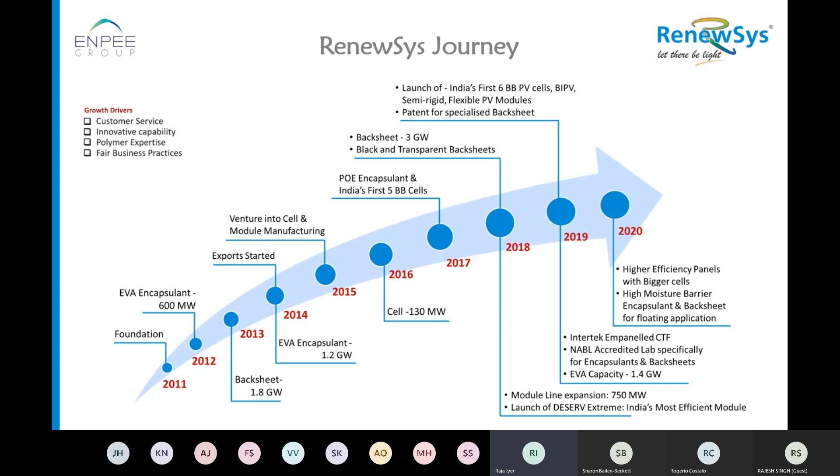The strength of Renewsys is the laboratory and technical expertise. We have got two different R&D centers, one in Bangalore for the components and one in Hyderabad for the modules and cells. And we have a laboratory which has been approved by Intertek, and we have the total facility that testing of modules requires. We can do the IEC test, TUV IEC test, whatever TUV does in the laboratory. Apart from one or two tests, we can do all the other tests in-house.

So many manufacturers in India or globally, whenever they set up a new facility, they come to us. We provide them not only with the components, but we also test their initial modules or samples and give them the results. Though we cannot officially certify it, we can give them a very good report based on which they can go ahead with the certification process.

As I said, we have two different facilities. In the module line, we have got 750 megawatts. Cells, we have 130 megawatt in Hyderabad. And in Bangalore, the encapsulant line is 1.4 gigawatt, where we manufacture not only EVA, but also POE. And the backsheet line is around 3 gigawatts.

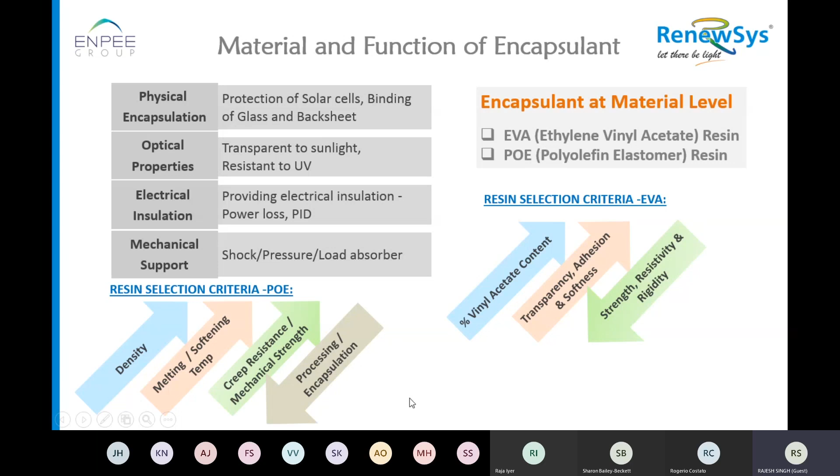Similarly, for POE, the selection criteria is based on the density. I'm just trying to give some more technicality, just to make you understand how selection of polymer happens during manufacturing of these products. So when density increases in POE, its melting point and softening point increase. Creep resistance, mechanical strength, actually they increase, and processing of encapsulant, even at our end where we do manufacturing, and the lamination process, little bit reduces because of its own nature.

Going to encapsulant manufacturing, I have tried to give some basic idea how it is manufactured in the factory. We take resin, which is in pellet form, then mixing of additives is done at the level of manufacturing, where additives could be in liquid form, powder form, or in pellet form. We make this into compound form, and then this compound is fed into an extruder, which is nothing but a heat and process from starting into the extruder.

Then it is cast on a roll, which is a chill roll, and finally it comes on a winder, where a roll form of encapsulant is made, which looks like this. This is just a roll, which could be say 100 meter to 200 meter or 300 meter length, and they look like this in the sheet form. I think you all know, because you must be using these encapsulants in sheet form almost every day.

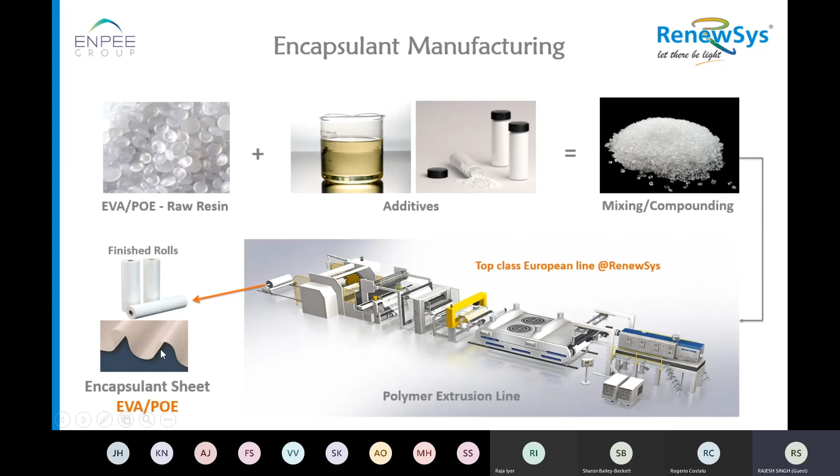Now coming to a little more technicality of encapsulant, how does it function? Encapsulant, whether it is POE based or EVA based, is actually polymer. The polymer is a plastic material which has various types of molecules of different chain length, branching, short branch, long branch, which look like this in the linear form.

So when we do the formulation at our end, where manufacturing happens, we add some cross-linking agent which then reacts in the module under heat and pressure, and they get cross-linked. So one polymer which is in sheet form before lamination converts itself into rubber form, where the resin attains its own property of longevity, which makes the module survive for its lifetime in the field.

A few basic properties of encapsulant which we control are degree of cross-linking, by way of formulation and process, and transparency, again based on the selection of material and process involved in making them in the sheet form. We add some material which makes peel bond, or bonding of these encapsulants with cell, glass or back sheet, because encapsulant is the only material which binds everything together. It also provides volume resistivity, which gives PID resistance to the cell and complete module when it is made. And finally, dielectric strength is the electrical property of the module, which gives safety.

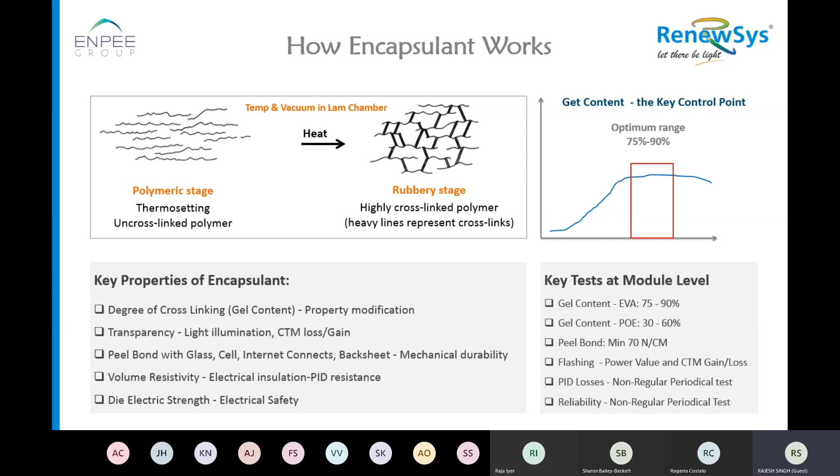For example, gel content, peel bond, flashing of the module based on their flasher, which gives how much wattage has been generated or how much is CTM loss or gain after making the module from cell to the final stage of module. And PID losses also is one property which is to be tested, because this is one which gives power loss when modules are installed in the field in a hot and humid condition. Reliability, of course, is a major factor in a module, because they are supposed to be in the field for 25 years, and largely the quality of components including cell, backsheet and encapsulant determines its longevity in the field.

Moving to the next slide, I have given a brief comparison between EVA and POE encapsulant. So basically EVA was introduced, as I said, around 20-30 years back. It was basically for glass to backsheet structure. Even today, this is the dominating encapsulant in the market, and glass to backsheet is the dominating design of module in the field. So if I do the one-to-one comparison, glass to backsheet is for EVA, whereas TPO or POE can be used for glass to glass. It could be used for crystalline silicon cell, thin film technology module, whether it is for CIGS or it is for cadmium telluride. These are a few technical names. I hope that we all understand, but any more clarification can be given later.

So EVA is cross-linking type. POE could be cross-linking or non-cross-linking type depending on the structure of the POE during the formulation. Mechanical strength of POE is more. POE also has a property which is called creeping if it is not properly cross-linked, because as I said, there are two types of POE available in the market. So non-cross-linkable POE can give creep, especially for glass-to-glass configuration of module. PID is one property which is very good for POE encapsulant because they are naturally electrically insulating in nature, and its volume resistivity is 10 to the power 16, unlike EVA which is 15 or lower. POE is also better in moisture property in terms of moisture barrier and its sensitivity to moisture.

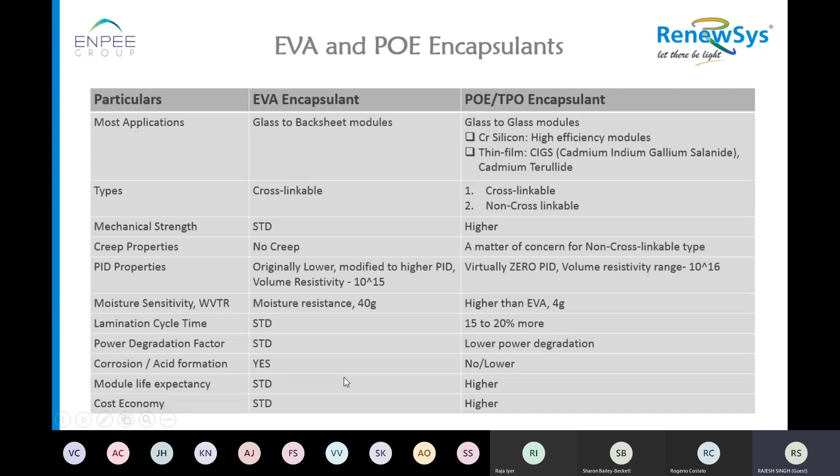The only drawback of POE is that it takes a little more time in lamination. Generally, it is glass to glass which is used for this, and it takes a little bit longer time to penetrate heat through two sides of glasses. And it is less corrosive. It is higher in module life expectancy because it does not create any chemicals, and also it does not create what is called acetic acid, because POE is neutral, or we can say non-polar material, whereas EVA has acetic acid formation because of presence of vinyl acetate, as we discussed before.

Now among various encapsulants, we said EVA and POE are two dominating ones. And within EVA and POE, there are two variants of encapsulant. One is UVT and second is conventional. UVT is nothing but ultraviolet transparent, which is a new entrant into the technology of PV, which came around 3 years back. If I give a very brief comparison, in conventional encapsulant there is some formulation in the recipe which makes light get blocked if it is less than 360 nanometer. The purpose is to block this light, which is UV rays, which were supposed to be harmful for the cell and the backsheet below it earlier.

But now, due to the invention of newer technology and better material in the PV segment, we can now allow this light to pass through the encapsulant, and it can generate more power, because when more light reaches the cell, it can generate more power because more incident light is falling. This happens only when you open the window of encapsulant from 360 nanometer onwards to 220 nanometer now, because that is the main purpose of doing this, making it UV transparent.

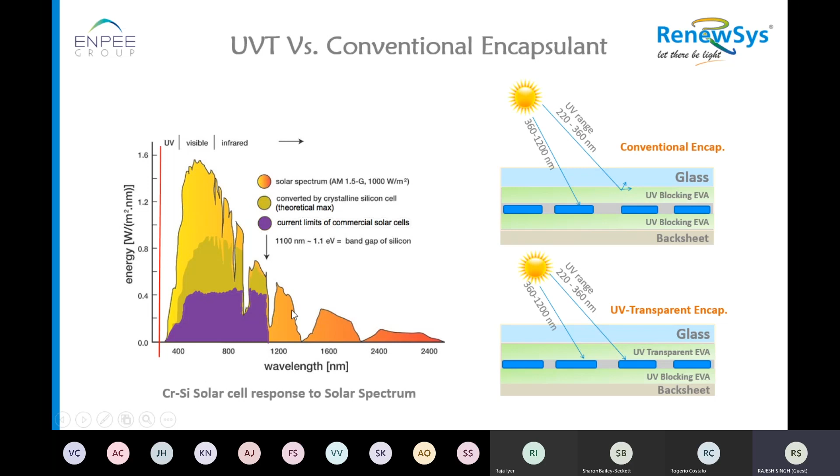If I tell a little bit more on this, the sun contains light all the way from around 200 nanometer to 1200 nanometer. Earlier, people used to block from 200 nanometer to 360 nanometer, and they were allowing only from 360 nanometer onwards. But now, if we allow from 200 nanometer or so, that much more light we get on the cell, and the cell generates more power.

Now, PID is another phenomenon which the industry learned around 5 years back. It is the phenomenon where power loss happens during field generation, especially when negative system voltage is generated in the string where the climatic condition is hot and humid. PID is actually caused by various factors in the PV system, starting from the system level to the module level, to the environmental level, and finally cell level.

This is two types, reversible and non-reversible. Reversible is something which is just polarization during the day, and when you earth the module from negative system voltage it goes away completely. But if the phenomenon continues for a longer time, actually the electrochemical reaction happens, which leads to corrosion of metallic parts, and then it becomes difficult for PID to get reduced.

In that case, if I focus only on the module level PID control, which is actually caused by low volume resistivity of encapsulant or maybe the type of encapsulant. So at module level, it could be controlled by reducing the conductivity or increasing the volume resistivity. These are properties which are inversely proportional. Or we can choose an encapsulant which is non-polar in nature, and that is the POE we discussed, where its volume resistivity is higher naturally.

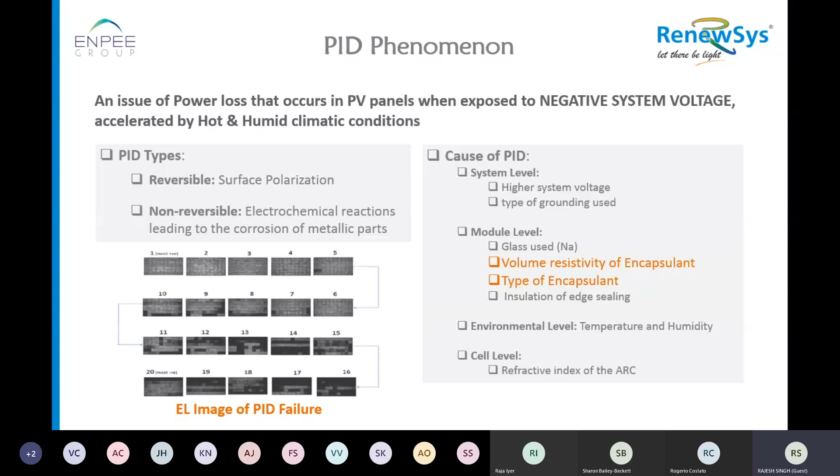At cell level, it is controlled by increasing the ARC, which is called anti-reflective coating, which is done during cell manufacturing. And this is actually nothing but increasing the refractive index of the anti-reflective coating. Because PID is caused by the PV system at different levels, the solutions are also derived at different levels.

So if I talk only on the module level problem, which is caused by low volume resistivity of encapsulant, we could see here that an encapsulant of around 10 to the power 15 ohm centimeter is good enough to control PID caused by encapsulant in the module.

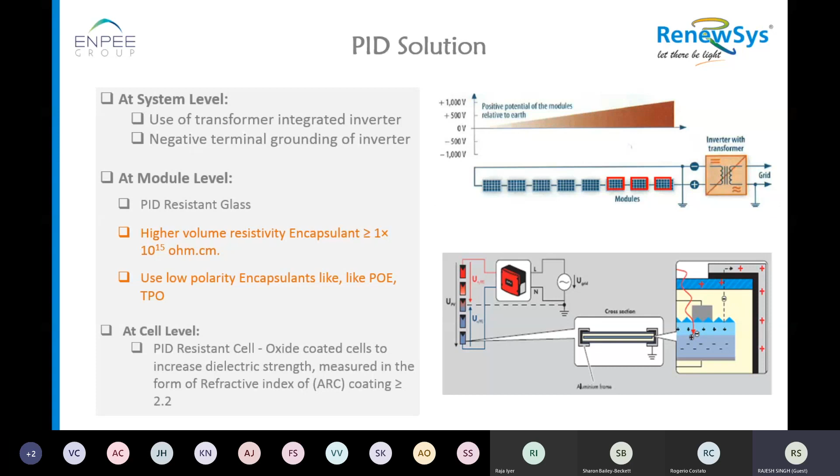Whereas if we use POE and TPO, let me tell you, POE and TPO are the same. They are called interchangeably from country to country, company to company, but generally POE is a little more cross-linkable, TPO is a little less, but in fact they are the same material. So if we use POE or TPO, they are naturally more volume resistant and give more resistivity to the cell, stopping the current leakage.

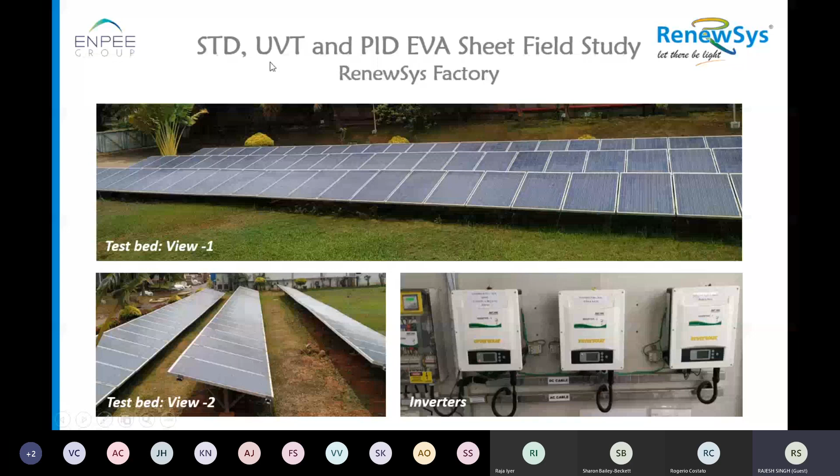We have done one interesting study in our company where we installed module demo plants of 6 kilowatt each using standard EVA, UVT EVA and PID EVA, and we compared the data of the last 3 years, and found that whatever is talked theoretically, practically we are getting the same result. So a few conclusions can be drawn: the PID and UVT combination gives the highest power in all the seasons, followed by PID, and the least power generation happens in standard EVA.

PID is the property which we said will reduce the power loss under hot and humid conditions, and UVT gives more light to the cell, hence generating more power every time. So these two combined give the highest power generation, and all three types are also seasonal. That means when there is more DNI, all three generate more. If it is low, all three generate low.

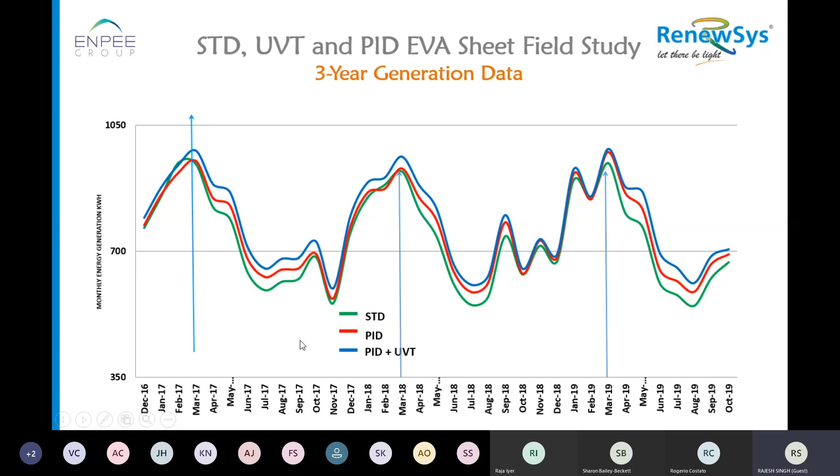So the difference is 6.6% in power generation from standard EVA to PID and UVT type. This is the 3 years cumulative data generation. So in conclusion, we can say that if one uses a PID and UVT combination of EVA at the front and PID plus standard EVA in the back, it will be the best combination to generate the highest power.

And this phenomenon will be noticed at the module level in your factory only if you have a flasher starting from 290 nanometer, because otherwise this will not get detected by your detector in the instrument, and you will not get the value, because the cell will not generate power since it is not getting the light. So the light has to be there, which is 290 to 360 nanometer, in your flasher.

And of course, solar glass is also one contributing factor for PID, which we have not discussed in detail because that was not the subject of the day, but it does contribute. And if we can match the UV cutoff wavelength of the glass with the front side EVA, it gives the best combination.

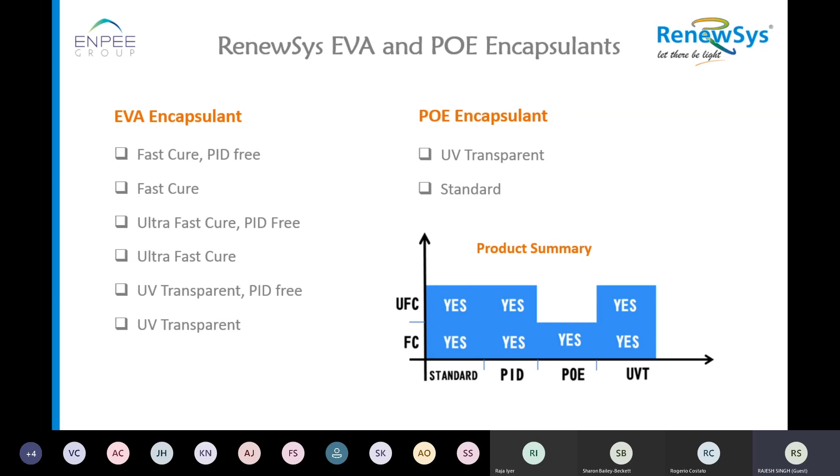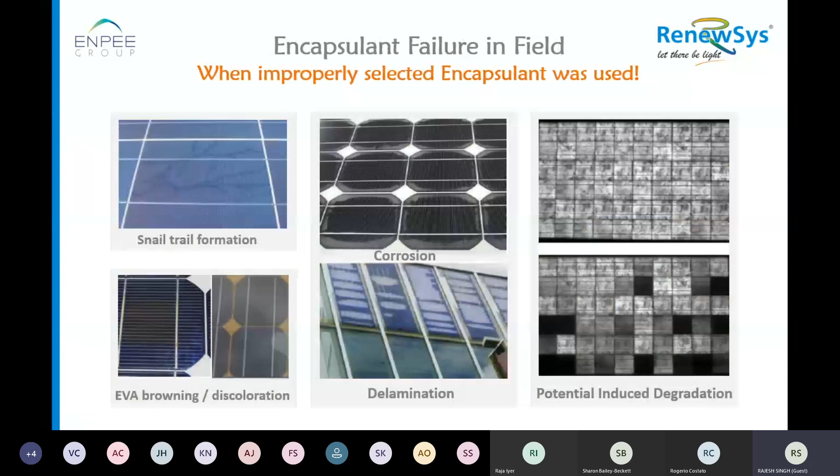Now moving to backsheet. Backsheet is typically 3 to 4 layers. It could be a laminated, coated, or semi-coated, semi-laminated sheet or polymer, of different combinations, which we'll discuss in the next slide. But starting with the function of backsheet, like we discussed for EVA, the function of backsheet is to give the module resistance from weather conditions.

It could be dirt, dust, chemical, hydrolytic attack by moisture which comes from rainwater or moisture from the ground, and it could also be resistance from UV radiation which comes from reflection of light from the earth.

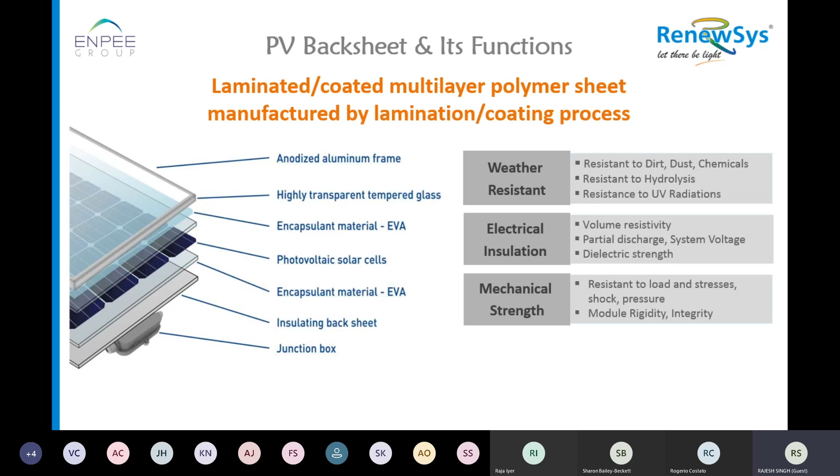It definitely provides electrical insulation because this is the only layer from outside which protects the cell, and this is the major safety aspect of a module, to be highly electrically insulating and resistive, to avoid burning or electric discharge. It also provides mechanical strength to the module because it covers it from the back, and you have to protect the cell through EVA to give the module mechanical rigidity.

There are basically three different types of main back sheets. Overall there are various types, but these are the ones covering the majority of the market. Starting with the laminated one: this back sheet is called laminated because all three layers, or both layers if it is two-layer, are laminated with adhesive, which is glue applied during the lamination process.

To give you a very rough idea, this could be all three layers laminated. Laminated and coated could be one layer laminated and the other layer coated, whereas the middle layer is common. A coated back sheet could have both layers, outside and inside, coated. The outside layer faces the air and the inside layer goes towards the encapsulant. A very brief comparison of properties, if I divide it into only laminated, and laminated plus coated and coated together.

A laminated backsheet should be preferred because of the cushioning effect, which results in less cell cracking. It gives better integrity because it carries more mass, more polymeric material with more toughness, and it is moderately priced.

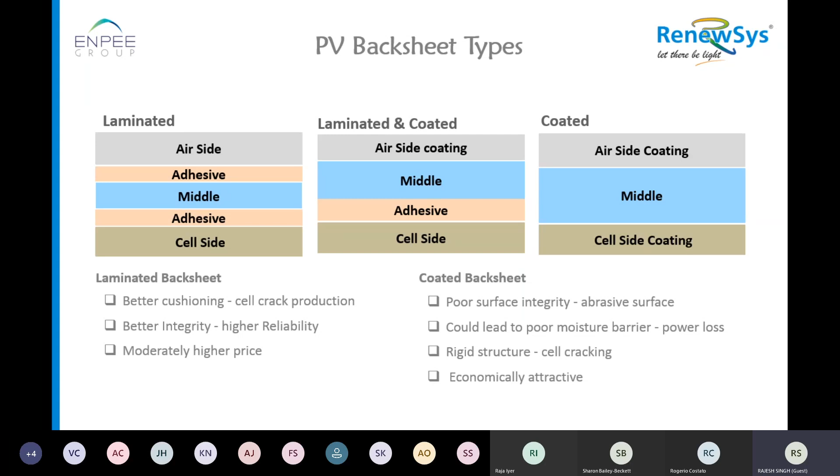Whereas a coated backsheet is poor in surface integrity because the surface of the backsheet is coated. This could lead to a poor moisture barrier because there is one layer, not a laminate of film, and any coating has porosity, so moisture passes through it. Then rigidity of the back sheet is higher because there is no cushioning layer, so it can lead to cell cracks. Of course, it is economically attractive because the cost of manufacturing is less, being two-layer coated or one-layer coated.

This is again a chart for a manufacturer like us, where we select various types of material for each layer: air side layer, middle layer, and cell side layer. These three layers are supposed to impart certain properties. For example, the air side layer has to have UV resistance, hydrolysis resistance, low moisture, because it faces the environment.

The middle layer gives more mechanical property, moisture barrier, and electrical insulation, because it gets protected by two layers, and all these critical properties are preserved within this layer, being sensitive. This could also be a foil-based back sheet, if the application is for a highly sensitive cell like CIGS or thin film, which uses a thin coating of photosensitive layer to be protected from moisture.

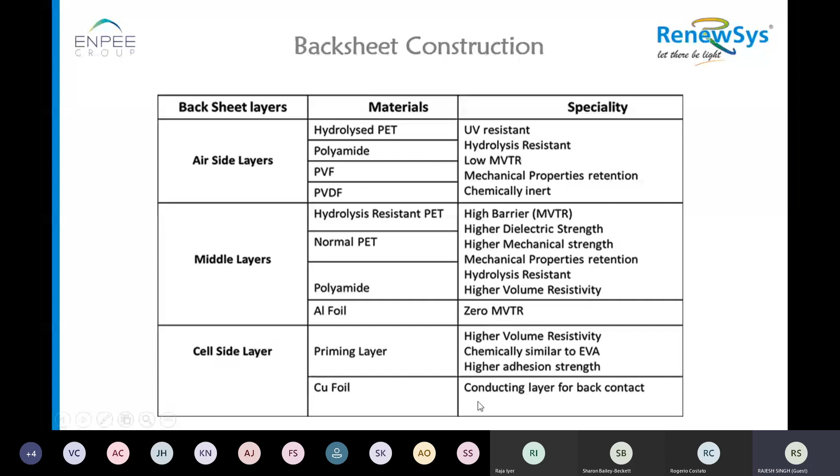Then the cell side layer of the back sheet should have better volume resistivity because it is going to face towards the cell. It should be chemically compatible with EVA because it is going to adhere to the EVA, and it should have better cushioning and pliability to support the cell from cracking.

Within back sheets, we have fluoro-based and non-fluoro-based. Let me tell you briefly, there are three scenarios where fluoro or non-fluoro types can be used. Non-fluoro types are the ones having polyester EVA, as we generally say in the market. These back sheets came into the market in 2008, and they picked up the majority of the market by 2012, because they were economically better but performed the same.

Single fluoro back sheet is actually the second stage after double fluoro. Double fluoro was the first backsheet, introduced maybe 20 years back at the start of module technology, where both sides of the backsheet were fluoro, and frankly it was not needed, because it makes the backsheet structure too expensive. At the same time, it is not too good for bonding with the cell, especially from the fluoro side which is towards the cell.

Single side fluoro is more preferred today. It is called fluoro polyester EVA, and the majority of the market is moving towards it because it gives the benefit of cost, and at the same time the property of fluoro on the top side, because you need fluoro more on the top side, which is the air side, than inside, where it is actually not needed. So industry has learned, and everybody, if fluoro, is now going for the single type. Though some companies are still using double fluoro, it is in fact not needed.

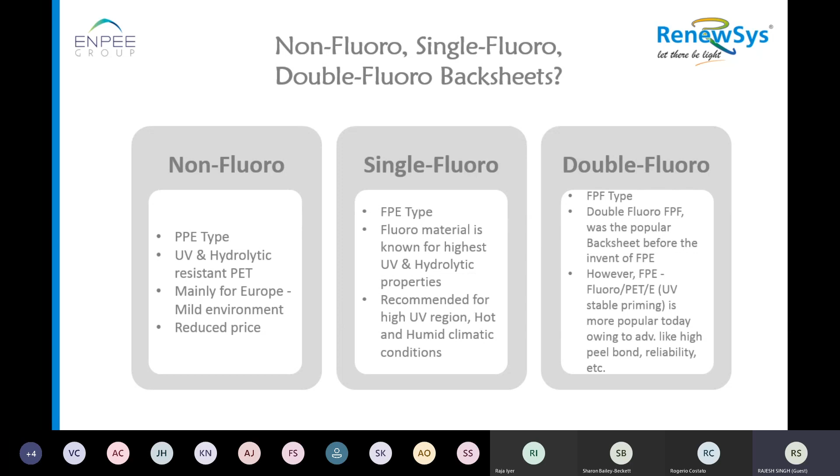Selection criteria for a backsheet start from structure, whether you want coated or laminated. This is based on the economics of the project. Then it comes to single stage or double stage, because the laminator makes a difference in using a particular type of backsheet: low shrink, high shrink. So we know what to do. We actually check with the customer what type of laminator they have, so that we can select the raw material accordingly.

Thickness of backsheet is important in terms of whether one is going to use the module for 1000 VDC or 1500 VDC. It's called voltage DC of system, and we select fluoro and non-fluoro based on whether you are in a more UV radiation zone of the earth or less. For example, in Arizona or Africa, where UV radiation is more in the sun, you actually need fluoro based, whereas non-fluoro based is more suitable for low UV radiation areas, like probably part of Europe or even US,

because those are more forgiving climates. Plastic or metallic based backsheets are used for special applications like metal wrap through or back cell contact. These are newer technologies which were introduced in the market 2-3 years back, but in fact because of cost they could not take off.

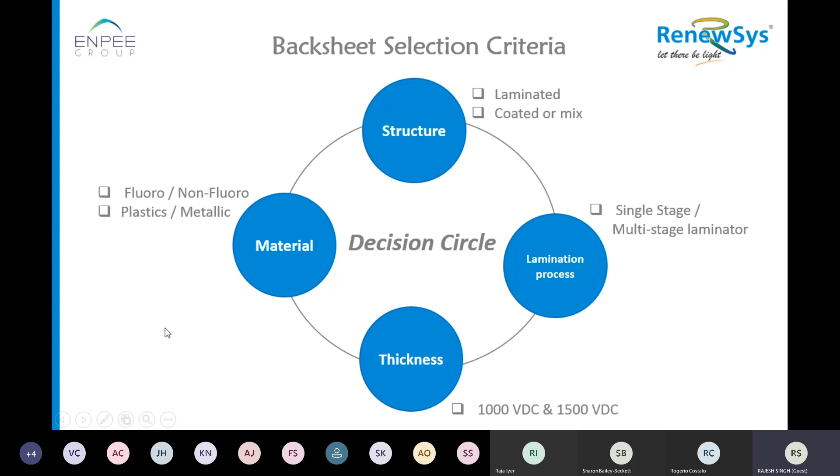So in a nutshell, in backsheet we discussed fluoro, non-fluoro, but all these types of backsheet could be transparent or could be white. So today 95% of the market of backsheet is white, which is normal glass to backsheet structure, whereas a new backsheet is coming into the market which is transparent backsheet, and this is to replace the glass to glass by glass to transparent backsheet. Glass to glass or glass to transparent backsheet modules are used for bifacial cells and building integrated photovoltaic BIPV. These backsheets are made by us, and we also supply them.

This is not a big market today, but the trend is to go for bifacial or BIPV. Time is moving towards this, and probably there will be good volume of transparent backsheet usage in future, maybe 2-3 years from now.

So glass to backsheet and glass to glass, if I give a brief comparison, it starts from lighter weight. Glass to glass is heavy weight. In fact, we'll share these PPTs, so I cannot go in each detail, but generally glass to backsheet is a preferred candidate today over glass to glass, basically because of fragility. It is more fragile and it is costlier, it is heavier.

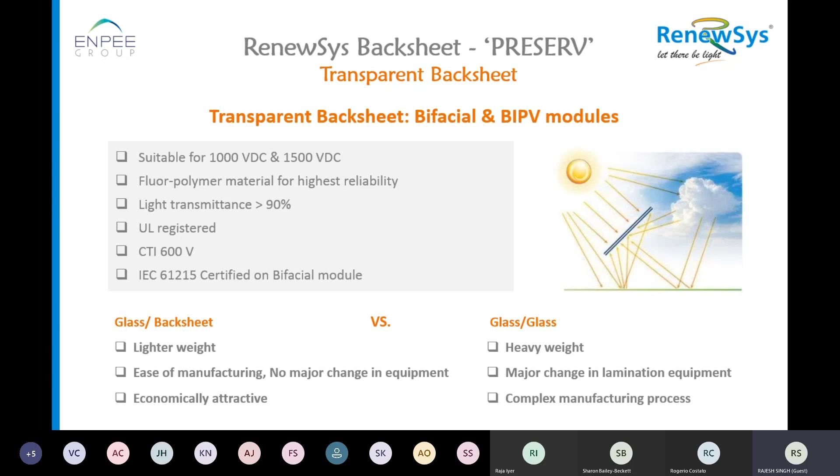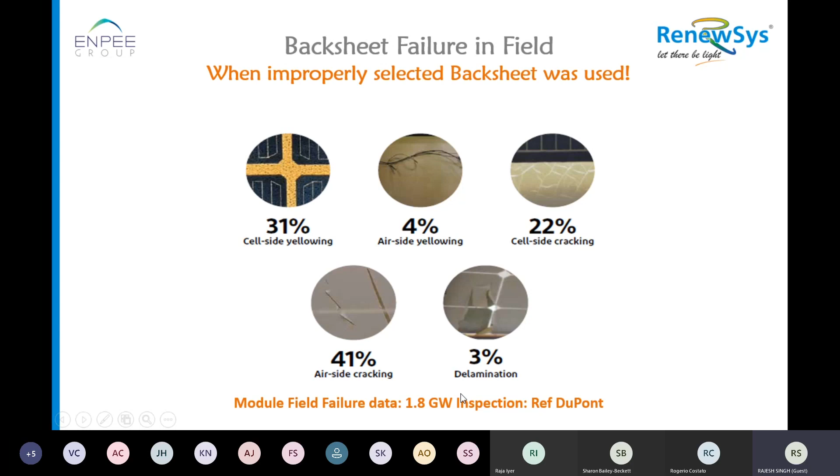A few field failures of backsheet, which I could pick up out of 100. So 31% is because of cell side yellowing. This is the yellowing in the backsheet, which is from the inside layer. That is what I said, faulty backsheet could lead to various problems. 4% is air side yellowing, 22% is cell side cracking, and then air side cracking, which is the outer layer of the backsheet, and 3% delamination happens because of faulty glue in the backsheet.

Products of backsheet with us are double fluoro, single fluoro, non-fluoro for 1500 to 1000 VDC. We also have bus bar insulation sheet in white and black color. So we have a variety of products. Some of them are leading products, some of them are not so common, but they are used for a niche market, for a special market.

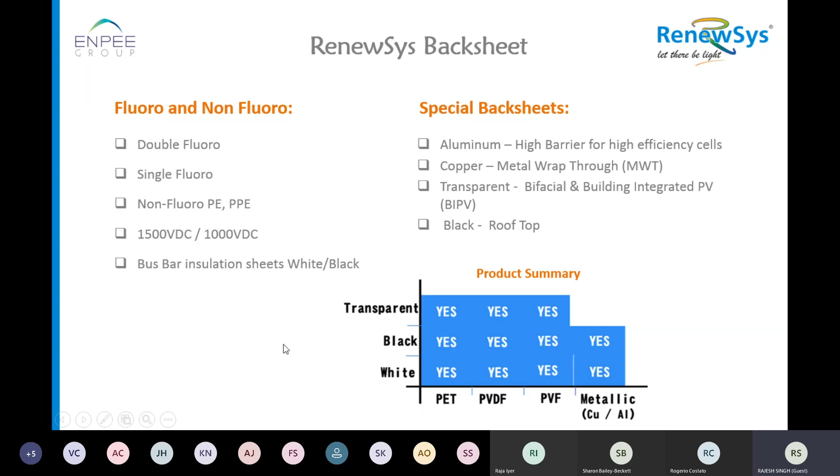Right from aluminum based backsheet, copper, transparent we discussed, and black, we have black to black and white and black to black. Black to black is used basically for rooftop modules where you need more aesthetics.

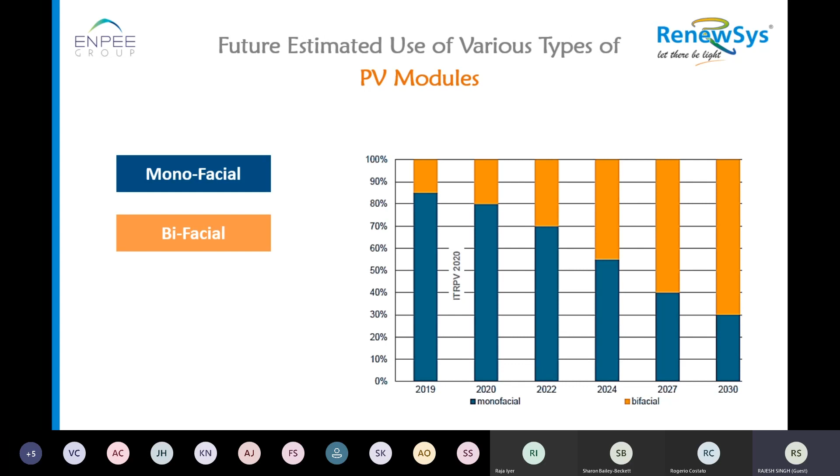And last probably is the type of module which is used in terms of monofacial and bifacial, because monofaciality and bifaciality decides whether the module has to be glass to glass or glass to backsheet. We already discussed this. So monofacial could be glass to backsheet, bifacial has to be glass to glass or glass to transparent backsheet necessarily.

Full cell and half cell cut modules are used now, and these are again emerging technology where half cut cells give less resistance and hence more CTM gain, or I'll say the least CTM loss. It gives actually more CTM gain sometimes, but it generally generates more power because of less resistive losses. So full cell module, half cell module, and quarter cell module.

Quarter cell module is one which actually is emerging. It has got a lot of complexity, but we have to see how it picks up in the market based on the availability of the equipment by the manufacturer.